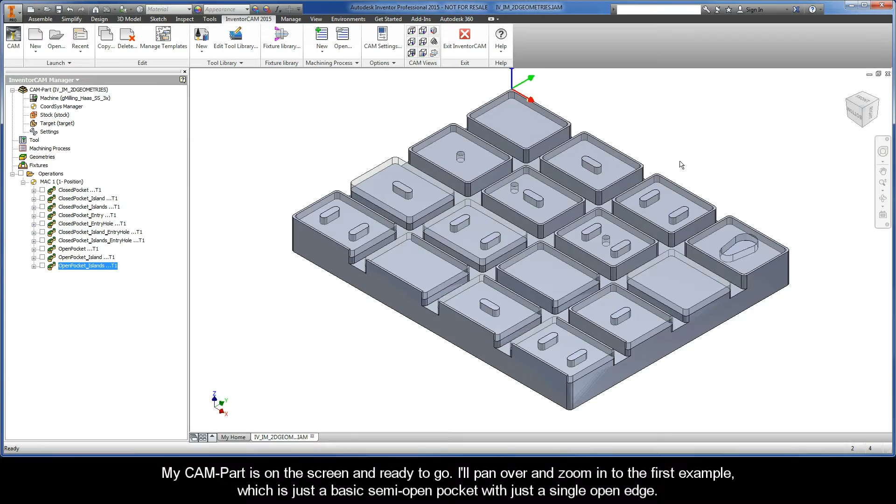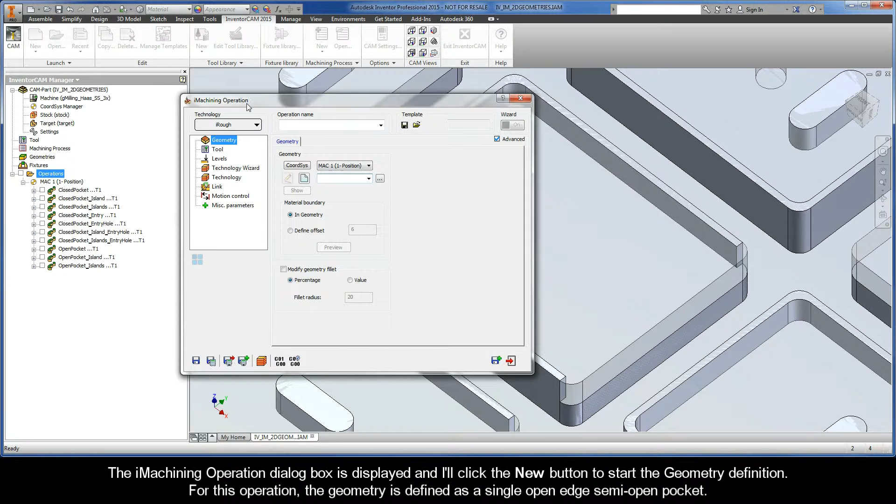My CAM part is on the screen and ready to go. I'll pan over and zoom in to the first example, which is just a basic semi-open pocket with just a single open edge. I'll go to the InventorCAM manager to add an iMachining operation. I'll right-click Operations, Add Milling Operation, and select 2D iMachining. The iMachining operation dialog box is displayed, and I'll click the New button to start the geometry definition.

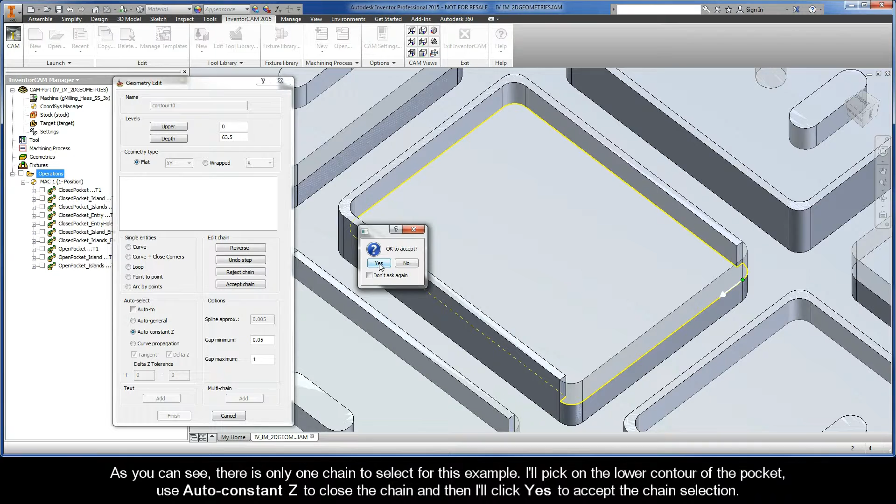For this operation, the geometry is defined as a single open edge, semi-open pocket. As you can see, there is only one chain to select for this example. So I'll pick on the lower contour of the pocket, I'll use Auto Constant Z to close the chain, and then I'll click Yes to accept the chain selection. Now the next thing I have to do is right-click Chain 1 in the chain list, like I've been doing in the previous examples. Only this time, I have to choose the option of Mark Open Edges.

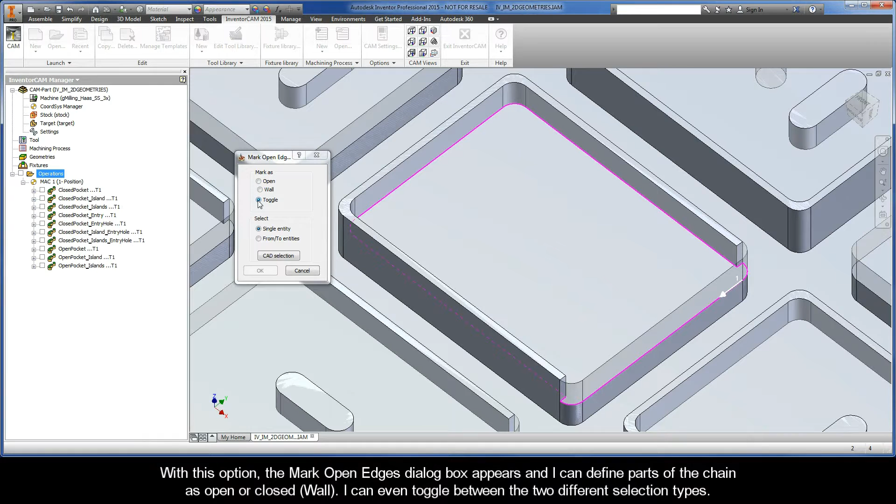With this option, the Mark Open Edges dialog box appears, and I can define parts of the chain as open or closed. I can even toggle between the two different selection types. I can also select a single entity at a time, or I can choose the From/To Entities option to simplify my selection. For this example, I'll use the default Mark As option of Open, and I'll switch the select method to From/To Entities.

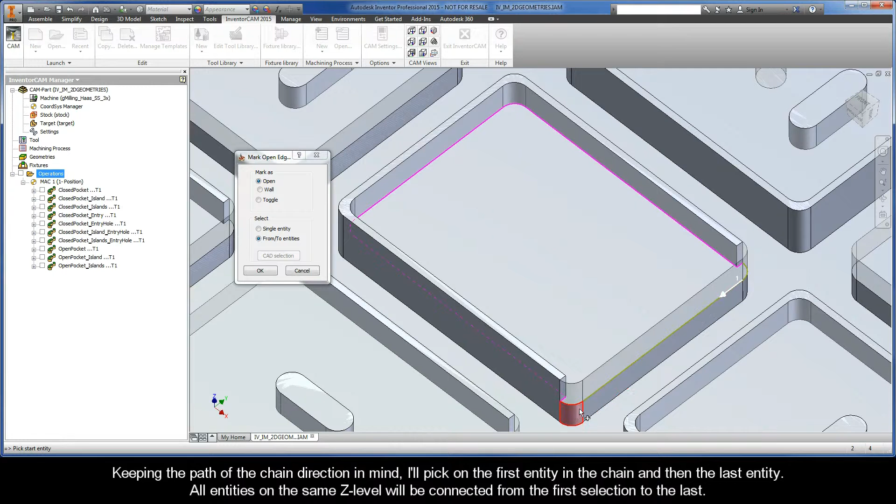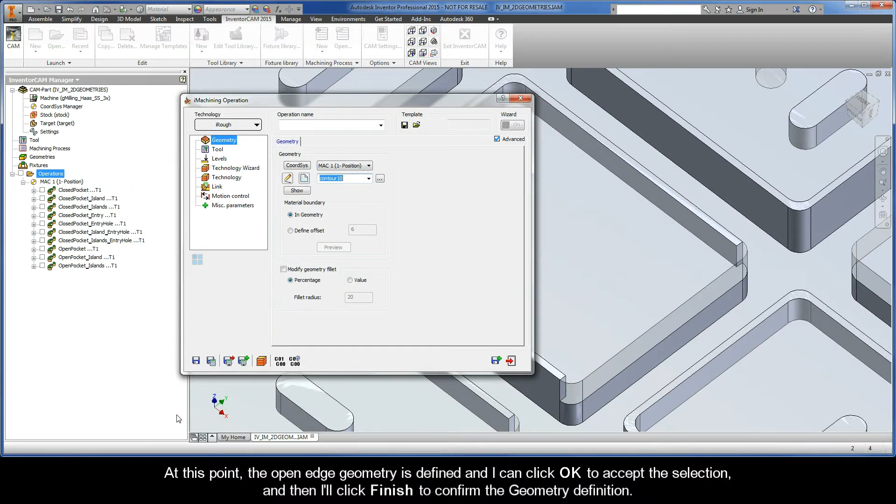Keeping the path of the chain direction in mind, I'll pick on the first entity in the chain and then the last entity. All entities on the same Z level will be connected from the first selection to the last. In the graphics window, you'll see that the color of the open edge changes to green. The iMachining technology is informed that the tool can now enter from this open edge. At this point, the open edge geometry is defined, and I can click OK to accept the selection, and then I'll click Finish to confirm the geometry definition.

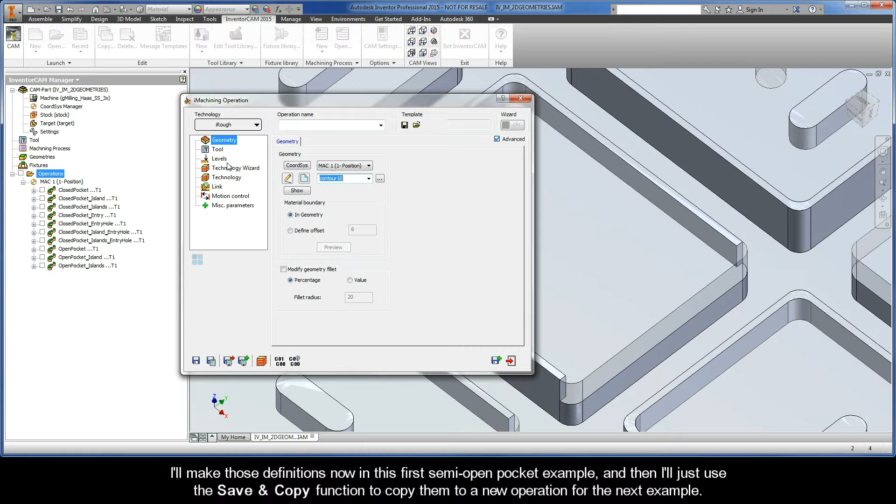Next, I have to define my tool and milling levels for the operation. If you're just joining in, all the pockets in this example use the same tool and have the same exact depths. I'll make those definitions now in this first semi-open pocket example, and then I'll just use the Save and Copy function to copy them to a new operation for the next example. Moving down to the Tool page, I'll choose my tool from the Part Tool table.

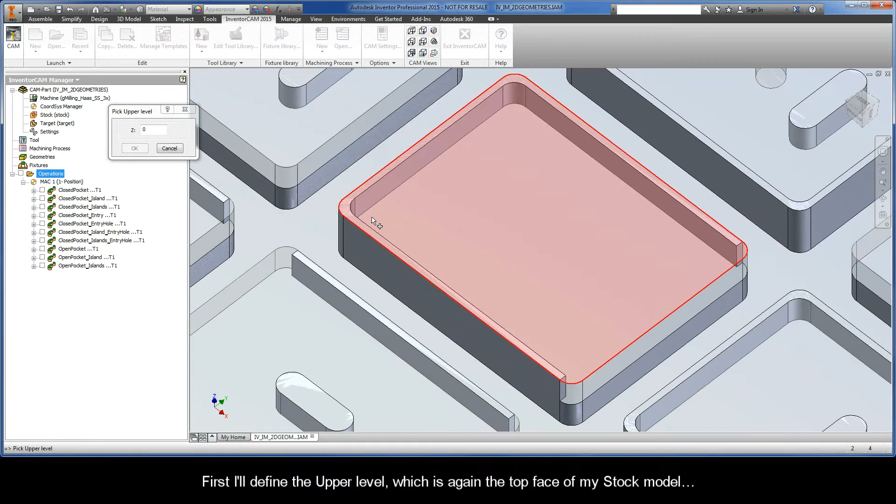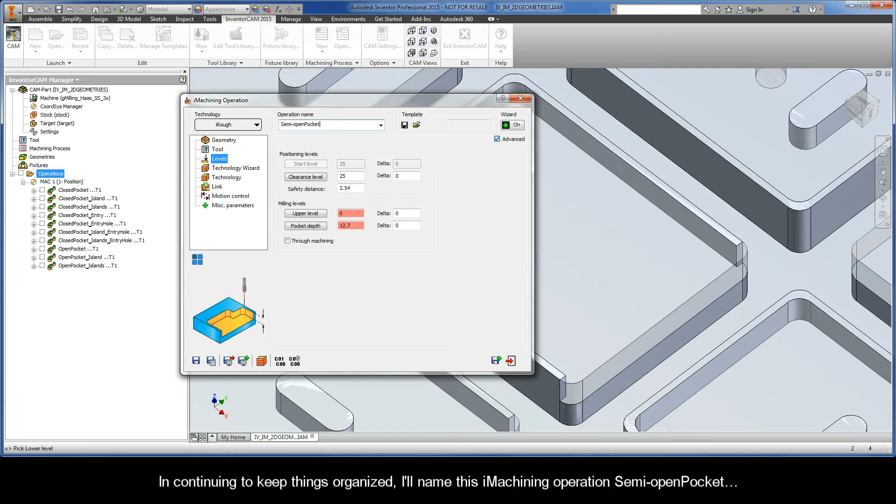Now to finish up the operation definition, I'll switch to the Levels page to define the milling levels. First, I'll define the upper level, which is again the top face of my stock model. Then I'll define the pocket depth, which is the bottom edge of this semi-open pocket. In continuing to keep things organized, I'll name this iMachining operation Semi-Open Pocket.

I can now click Save and Calculate to add the operation to the CAM tree and finally calculate the toolpath. Then, I'll click Simulate to open up the Simulation Control Panel. Using the Host CAD mode, I'll click the Play button. You'll see that the tool enters from the open edge and the toolpath continues.

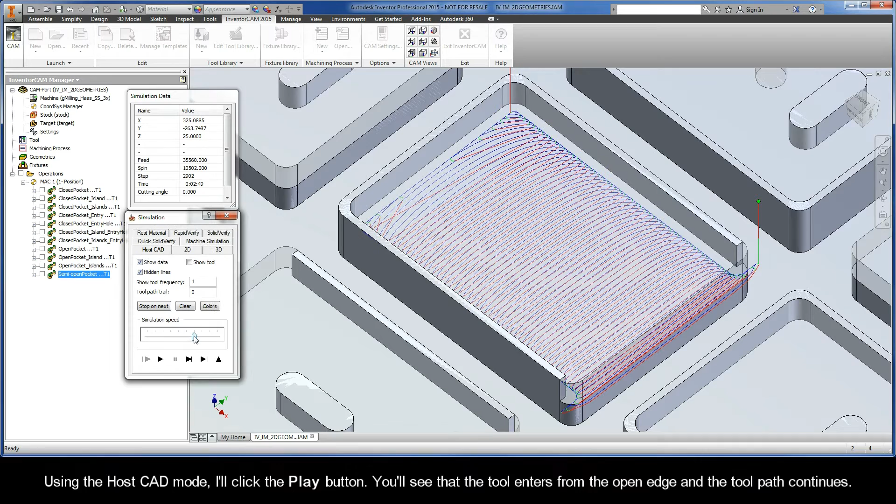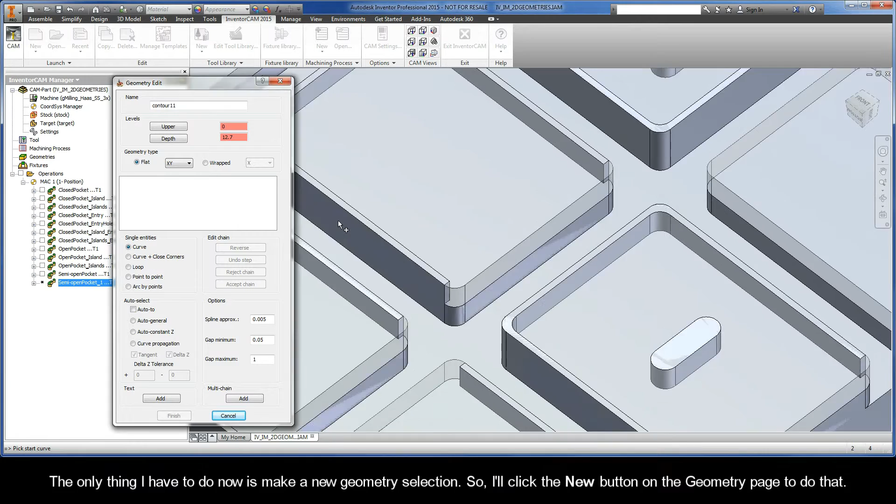Now I want to exit the Simulation Control Panel and simply just click the Save and Copy button. As I said before, all the definitions from the previous operation are copied over. The only thing that I have to do now is to make a new geometry selection. So I'll click the New button on the Geometry page to do that. I'll first pan over to the next example.

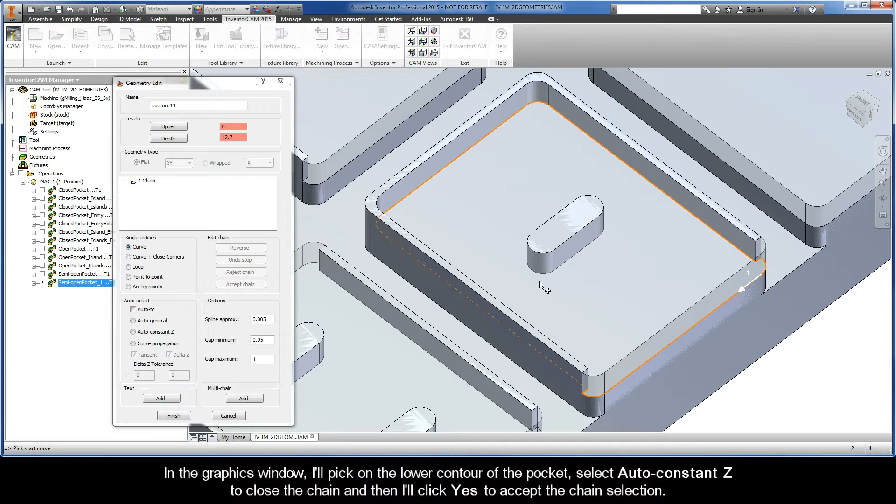Now for this operation, the geometry should be defined as a single open edge, semi-open pocket with island. The first chain to select is the pocket contour, followed by the chain on island contour. In the graphics window, I'll pick on the lower contour of the pocket, select Auto Constant Z to close the chain, and then I'll click Yes to accept the chain selection. I'll select the chain on island contour in a similar fashion.

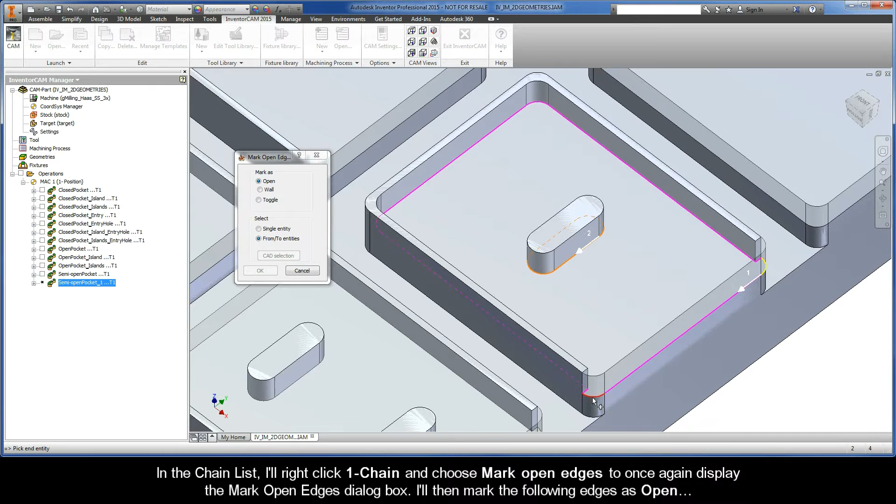Now in the chain list, I'll right-click 1-Chain and choose Mark Open Edges to once again display the Mark Open Edges dialog box. I'll then mark the following edges as open. I'll click OK to accept, and then I'll click Finish to confirm the geometry definition. Now I can name this operation Semi-Open Pocket Island.

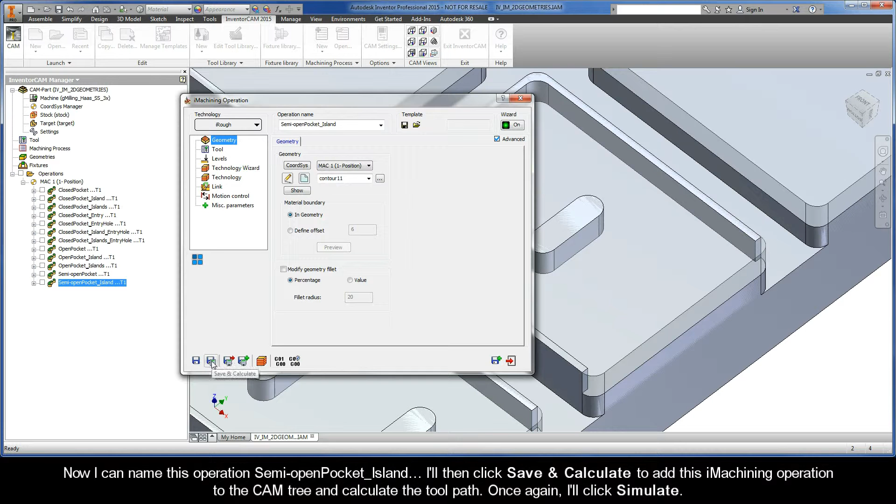I'll then click Save and Calculate to add this iMachining operation to the CAM tree and to calculate the toolpath. Once again, I'll click Simulate. This time when I click Play, the tool enters just as it did before. When the island is reached, it is separated from the remaining material first, and then the toolpath continues.

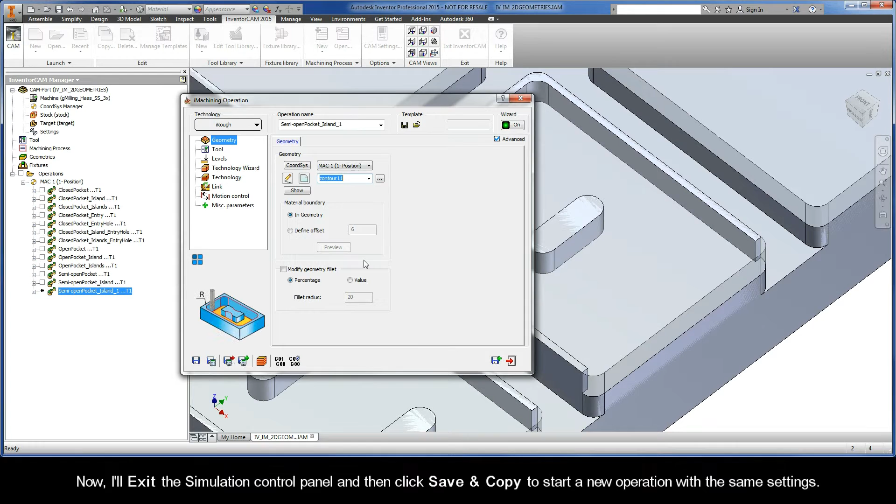Now, I'll exit the Simulation Control Panel and then click Save and Copy to start a new operation with the same settings. When the copied operation opens, I'll click the New button to start the new geometry definition. First, I'll bring the next example into view, and then I'll perform the chain picking.

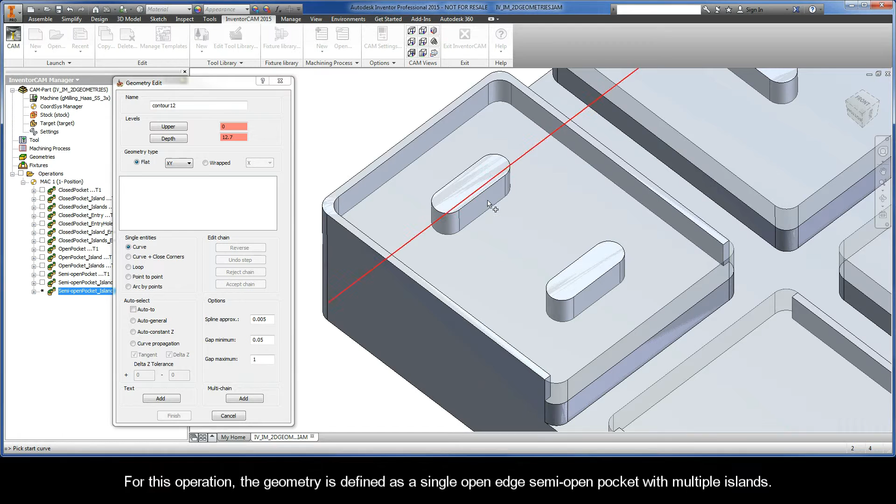For this operation, the geometry is defined as a single open edge, semi-open pocket with multiple islands. So here again, I'll select the first chain, which is the outer chain on pocket contour. I'll then select the two chains on island contours.

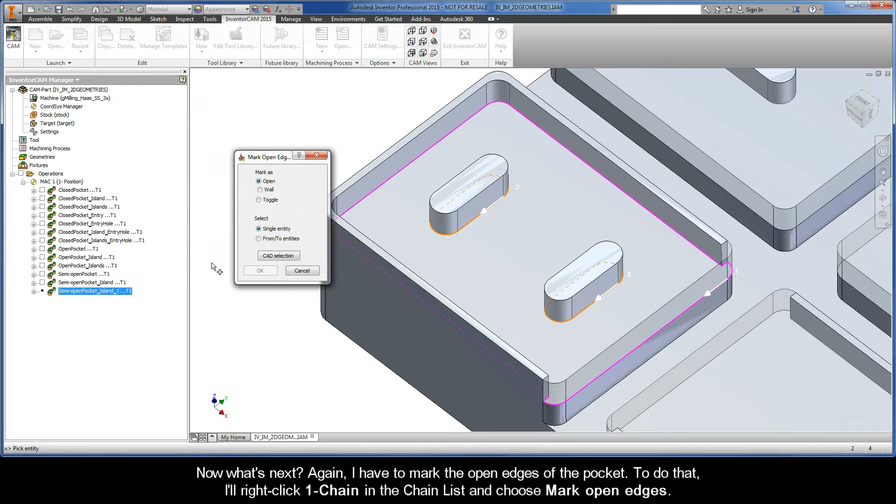So now what's next? Again, I have to mark the open edges of the pocket. So to do that, I'll right-click Chain 1 in the chain list and choose Mark Open Edges. I'll use the From To Entities option again, and in the graphics window, I'll pick on the appropriate edges. I can now click OK to accept, and then Finish to confirm the geometry definition.

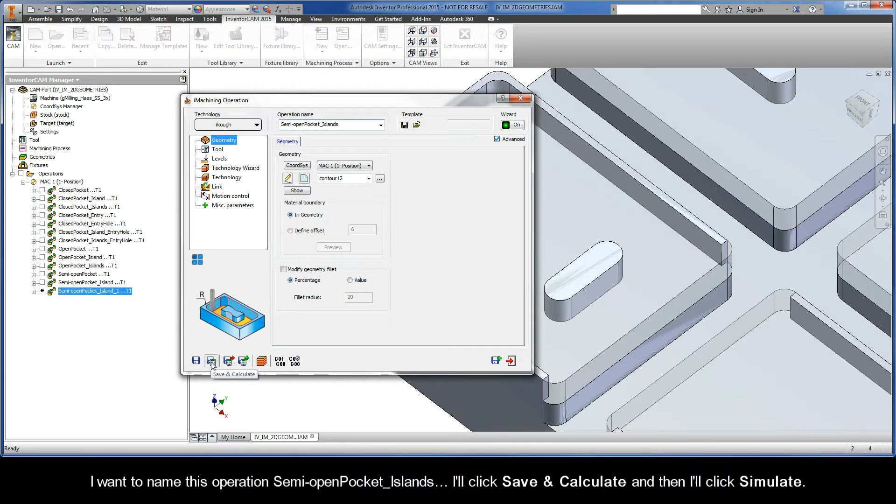I want to name this operation Semi-Open Pocket Islands. I'll click Save and Calculate, and then I'll click Simulate. When the Simulation Control Panel appears, I'll play the simulation. Just like it did previously, the tool enters into the pocket through the open edge. The two islands are separated, and the remaining areas of the pocket are cleared.

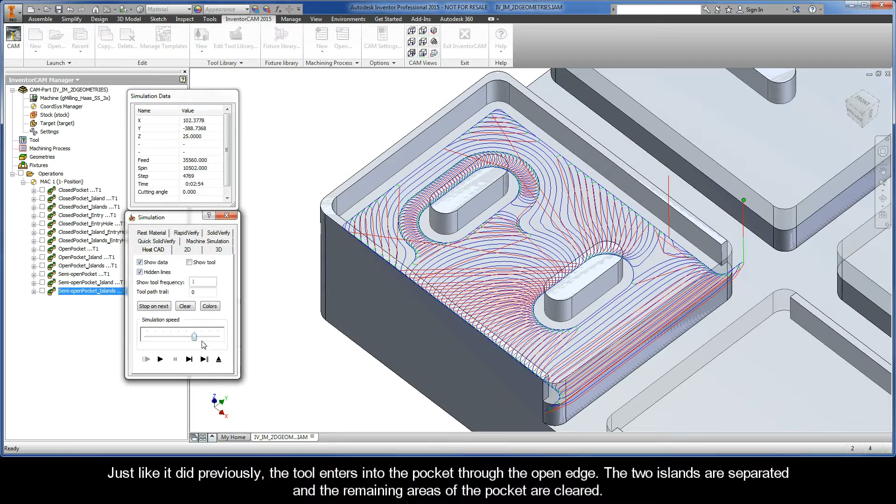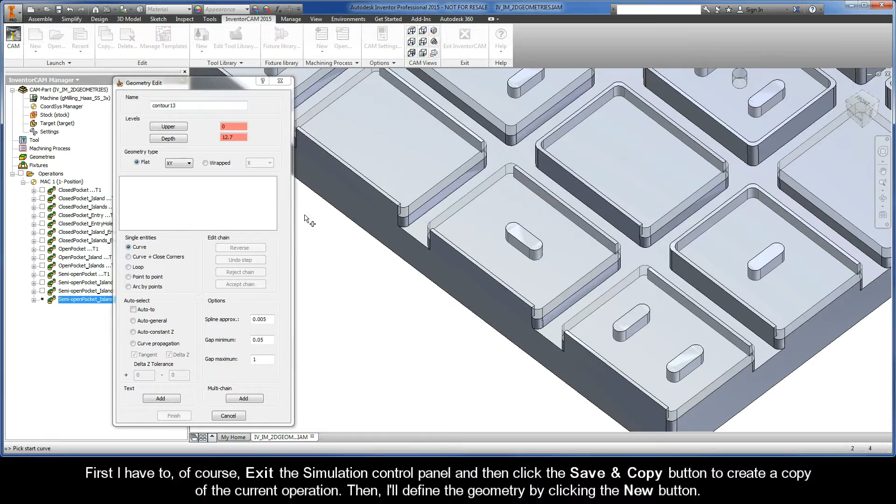Moving on to the last three examples, we'll take a look at semi-open pockets with multiple open edges. First, I have to, of course, exit the Simulation Control Panel, and then click the Save and Copy button to create a copy of the current operation. Then I'll define the geometry by clicking the New button. Now I'll zoom in to the next example. For this operation, the geometry is defined as a multiple open edge, semi-open pocket.

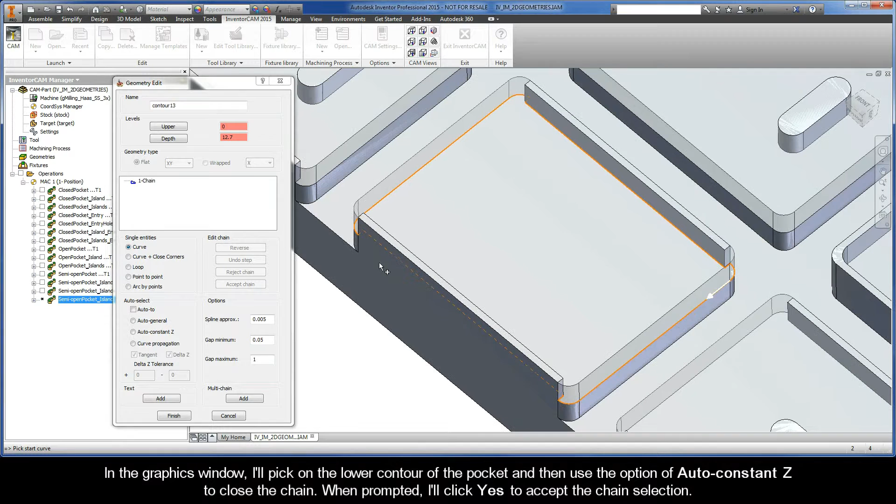In the graphics window, I'll pick on the lower contour of the pocket, and then use the option of Auto Constant Z to close the chain. When prompted, I'll click Yes to accept the chain selection. Now, just as I did before, I simply have to mark the appropriate edges as open. I'll again go to the chain list to do that, where I can right-click Chain 1 and choose Mark Open Edges. When the dialog box appears, I'll choose the From To Entities option in the Select section.

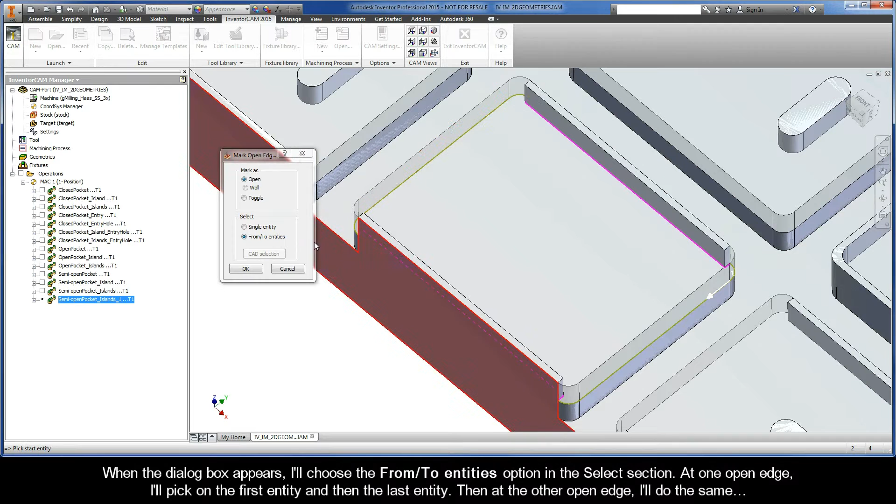At one open edge, I'll pick on the first entity and then the last entity. Then, at the other open edge, I'll do the same. Now I can click OK to accept and then Finish to confirm the geometry definition. This operation I'll name Semi-Open Pocket Two Edges. I'll click Save and Calculate, and then I'll click Simulate to open up the Simulation Control Panel.

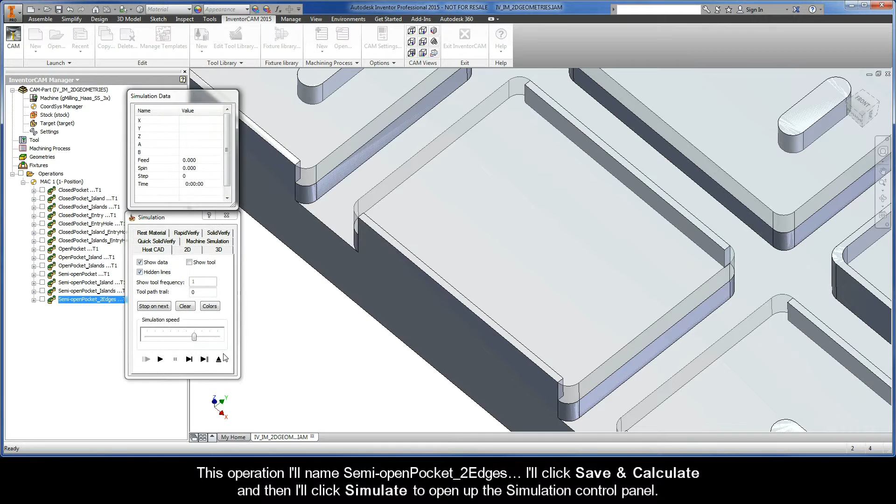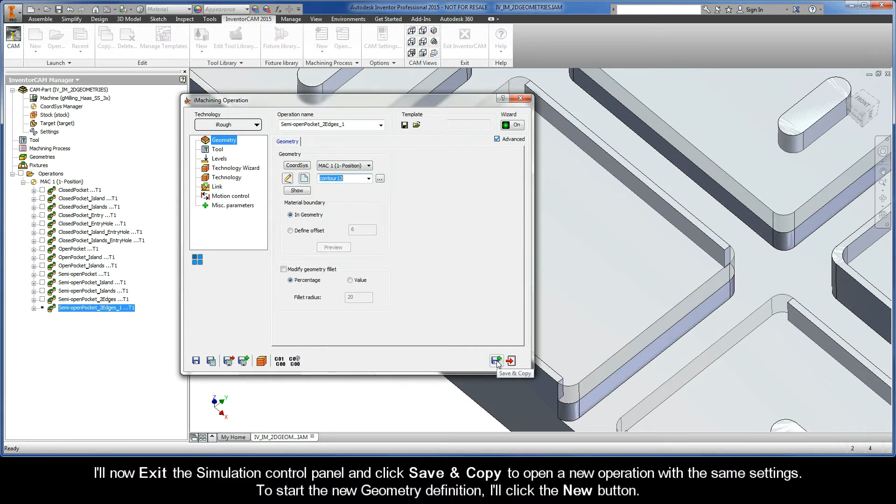By clicking Play, you'll see that iMachining uses another unique feature called separating channels in order to separate both walls from the remaining material so that a morphing spiral can then be formed. I'll now exit the Simulation Control Panel and click Save and Copy to open a new operation with the same settings. To start the new geometry definition, I'll click the New button. First, let me just move over to the next example.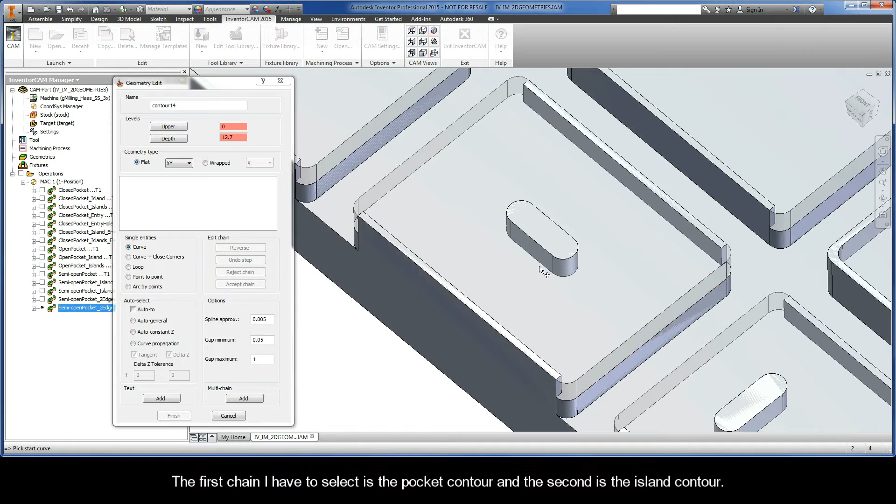For this operation, I'll define the geometry as a multiple open edge, semi-open pocket with island. The first chain I have to select is the pocket contour, and the second is the island contour. I'll pick on my initial edge in the graphics window. Using Auto-constant Z, I'll close the chain, and then I'll click Yes to accept the chain selection. I'll select the chain on island contour in the same way.

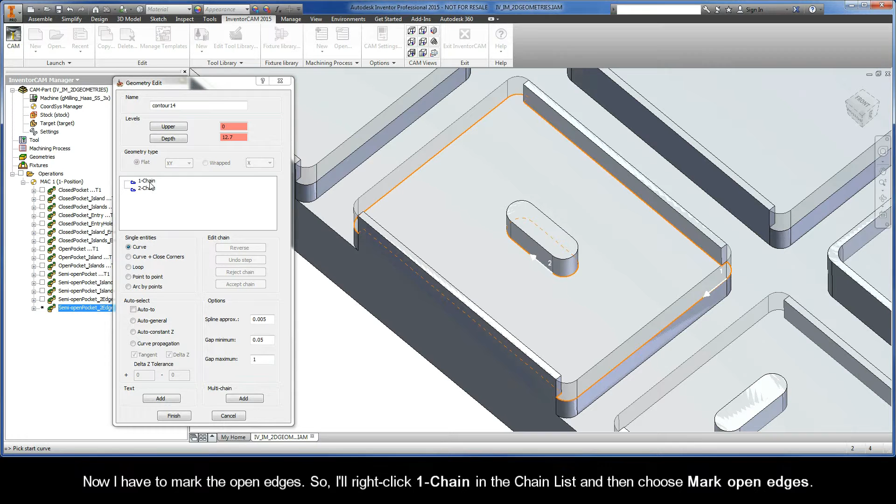Now I have to mark the open edges. So I'll right-click Chain 1 in the chain list and then choose Mark Open Edges. For Mark As, I'll leave the default option of Open, and I'll switch my select method to From To Entities. In the graphics window, I'll mark the open edges on the one side of the pocket, and then I'll mark the open edges on the other side of the pocket.

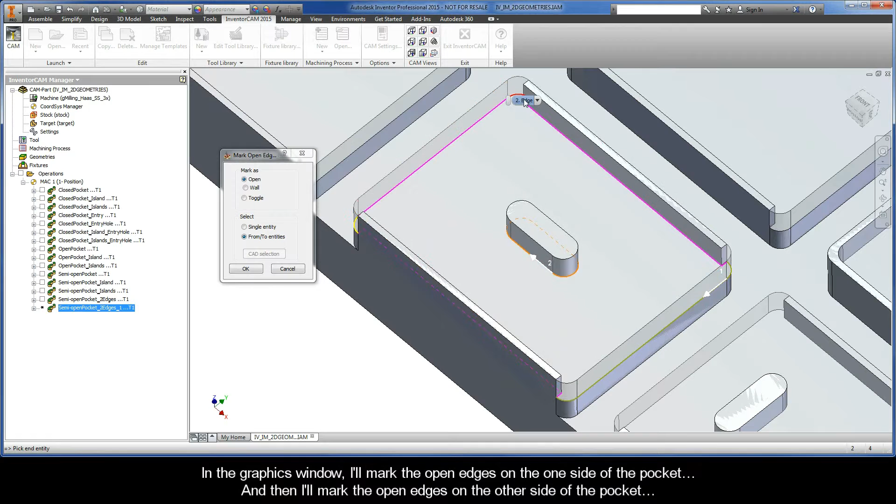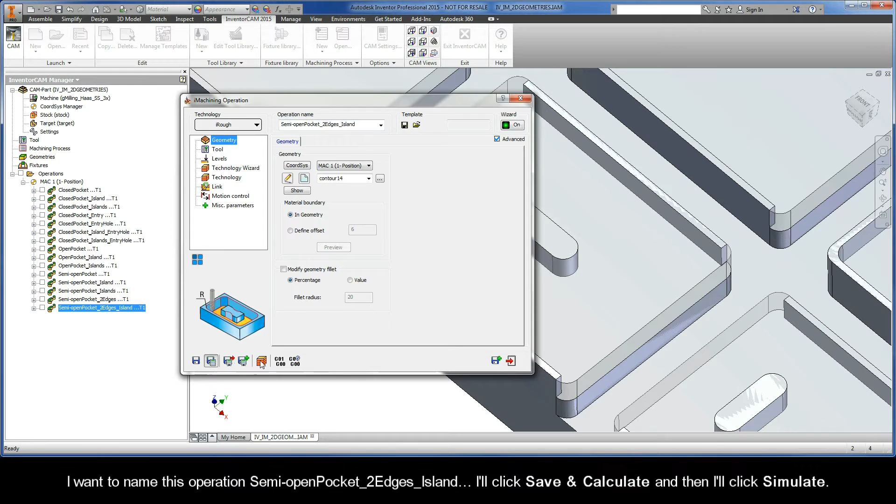Clicking OK will exit the Mark Open Edges dialog box, where I can then click Finish to complete the geometry definition. I want to name this operation Semi-Open Pocket 2 Edges Island. I'll click Save and Calculate, and then I'll click Simulate. When I click Play, we should see a toolpath similar to the one used in the previous operation. iMachining separates both walls and then collapses in on the island with a morphing spiral.

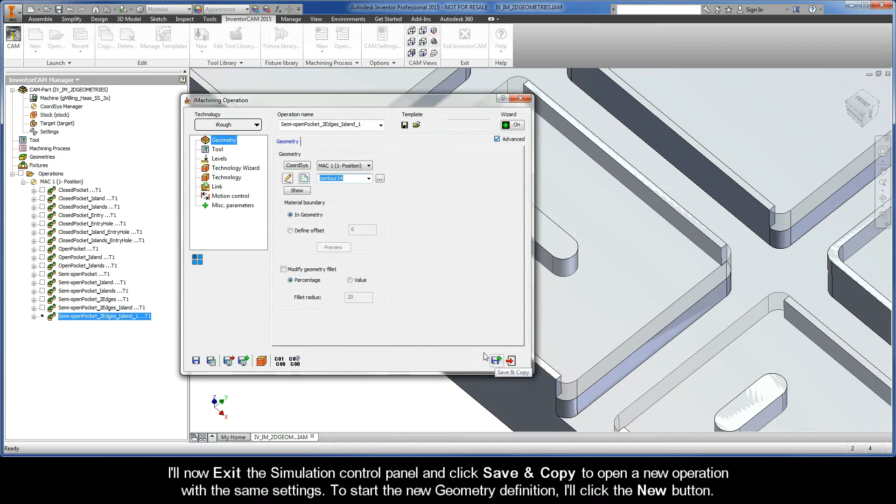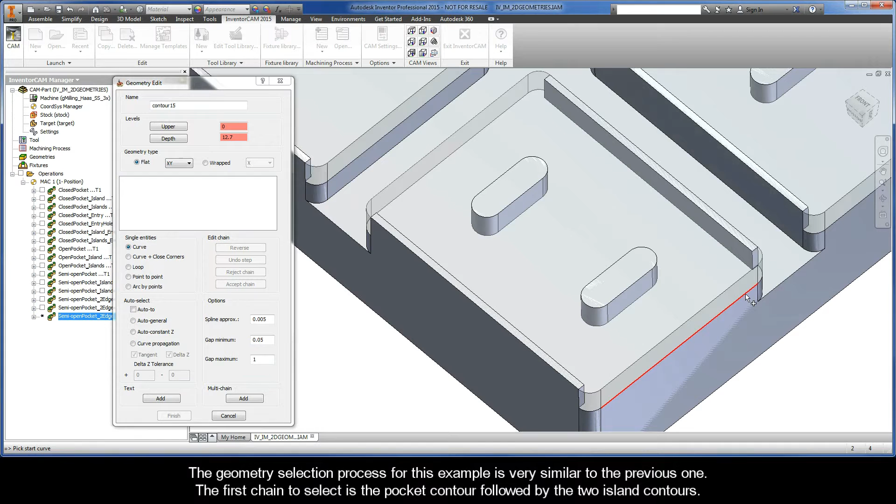I'll now exit the Simulation Control Panel and click Save and Copy to open a new operation with the same settings. To start the new geometry definition, I'll click the New button. Now I'll move over to the last example that I'd like to show you. For this operation, I want to define the geometry as a multiple open edge semi-open pocket with multiple islands. The geometry selection process for this example is very similar to the previous one. The first chain to select is the pocket contour, followed by the 2 island contours. So in the graphics window, I'll make my 3 chain selections.

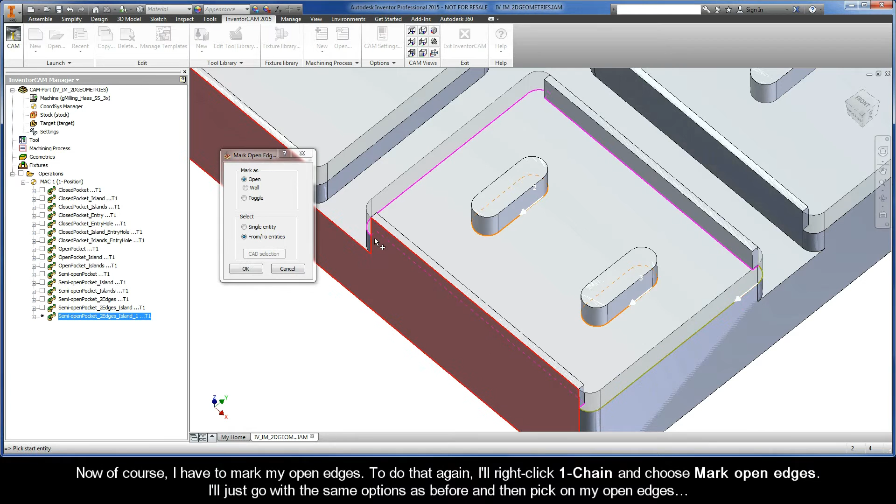Now, of course, I have to mark my open edges, right? So to do that again, I'll right-click Chain 1 and choose Mark Open Edges. I'll just go with the same options as before, and then pick on my open edges. When I'm finished with my open edge selections, I'll click OK, and then I'll click Finish to complete the geometry definition. I'll name this last operation Semi-Open Pocket 2 Edges Islands.

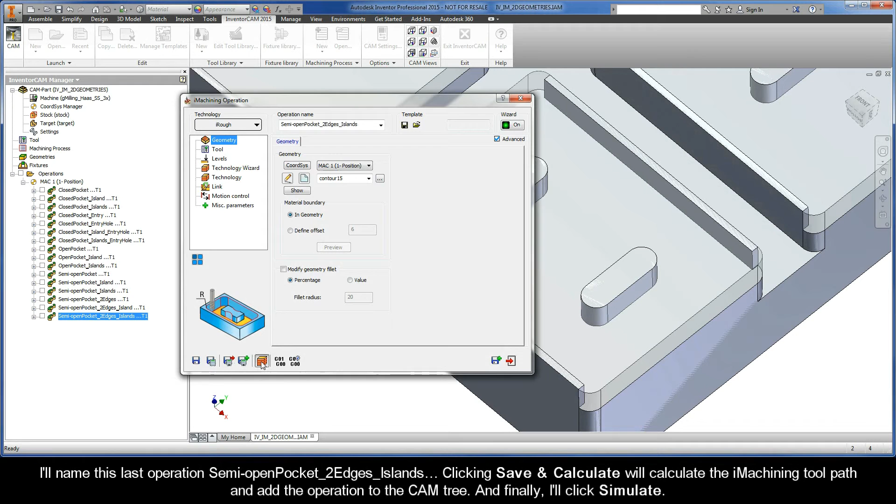Clicking Save and Calculate will calculate the iMachining toolpath and add the operation to the CAM tree. And finally, I'll click Simulate. When I click Play this time, iMachining separates both walls like it did previously. The first island that's encountered is then separated, and a final morphing spiral is formed around the second island.

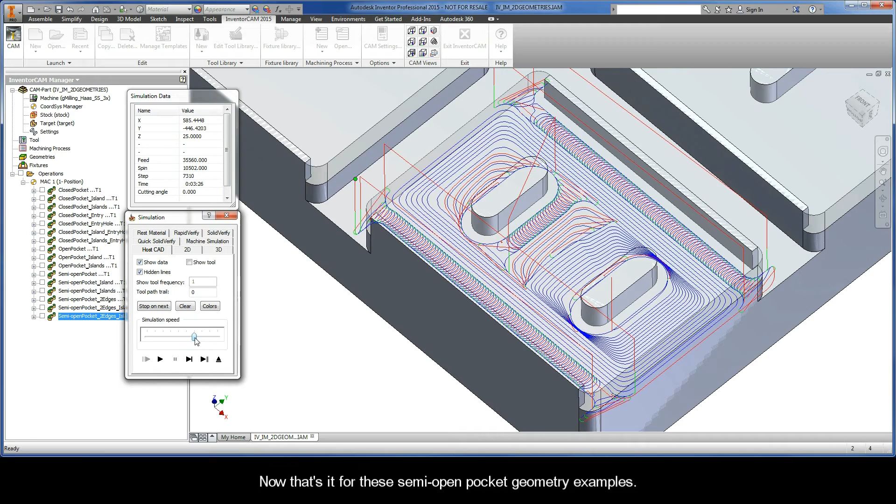Now that's it for these semi-open pocket geometry examples. As you can see, these are again just some basic examples. However, they're intended to help show the geometry selection process in iMachining and to also show the types of techniques that are used when cutting the different geometries.